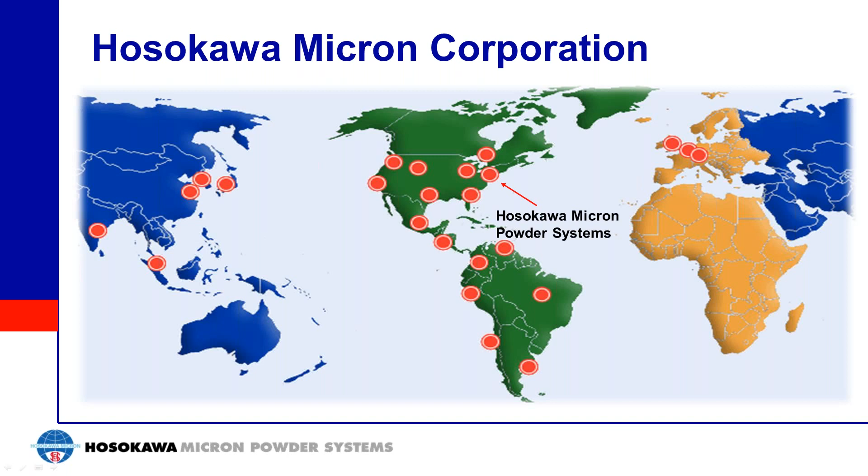Hosokawa Micron Corporation is a global leader in powder processing equipment with headquarters in Osaka, Japan. We employ over 1,500 employees worldwide, have production facilities in 5 countries, and 12 technical centers and research facilities. We design, manufacture, and assemble equipment for size reduction, classification, mixing, containment, isolation, compaction, and laboratory analysis. Our equipment is designed for the chemical, food, pharmaceutical, and mineral industries.

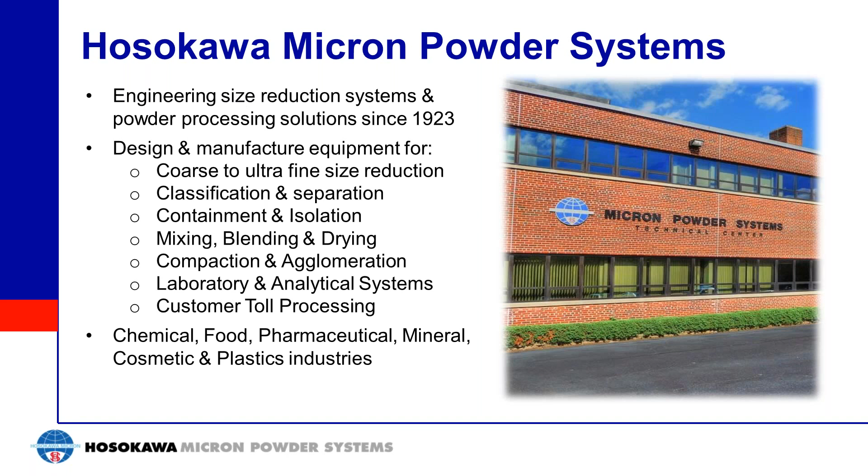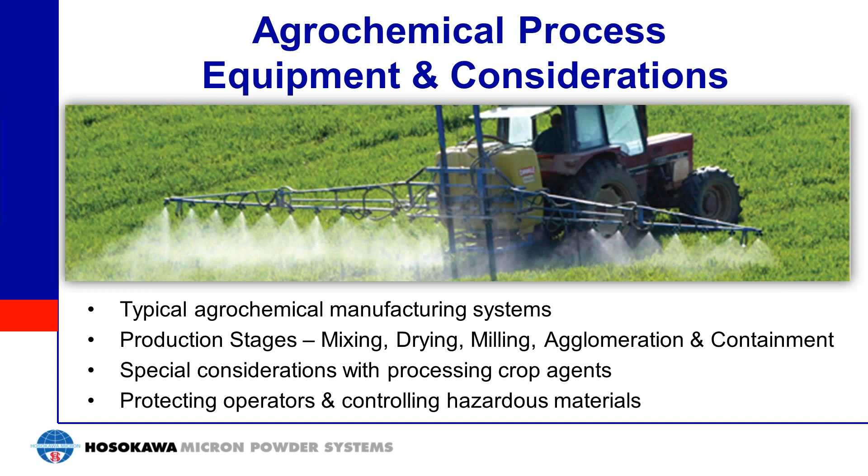Thanks for the kind introduction, Greg, and welcome everyone to today's webinar. Today we'll be discussing the typical agrochemical manufacturing systems, the normal production stages of mixing, drying, milling, agglomeration, and containment, and also special considerations for processing crop agents. Throughout the length of the discussion, we'll be discussing protecting operators and controlling hazardous materials.

So what are the typical steps for agrochemical processing and manufacturing? Well, it normally begins with a synthesis step, which is normally aqueous or involves some sort of liquid-based chemistry. After that, there's nominally drying, mixing, in which you'll take the dried material and add additives, size reduction, which you'll take all those manufactured chemicals and make them into the same size, post-blending, and then agglomeration to produce your final product.

We offer solutions for drying, mixing, size reduction, post-blending, and agglomeration. So these will be most of the steps that we'll be discussing today.

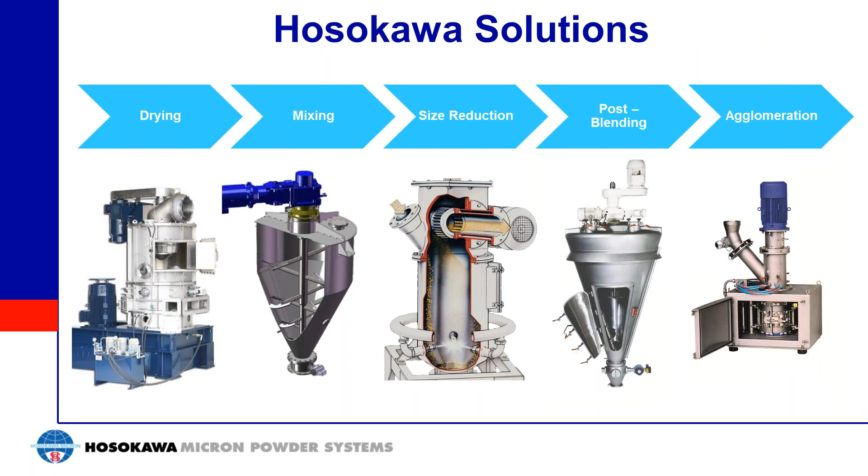So let's start by giving an example of a formulation process. In this process, we start with a feed product that's been dried. We would feed it into mixers that would homogenize the product, and then you can add additives into that mix to form further homogeneous product. From there, you can mill that and collect the milled product in mixers, further adding any final additives before packaging.

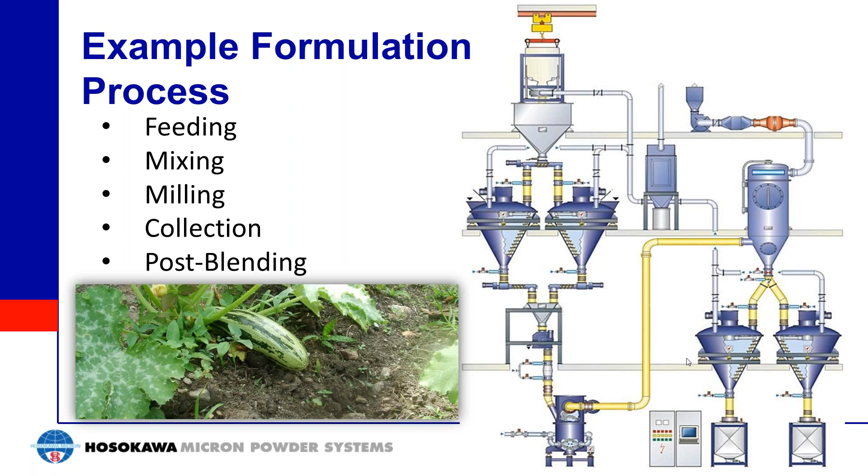So what are we going to consider as we go on today? We'll consider explosivity - a lot of these ingredients and additives are explosive, so we'll talk about how you can deal with that and which processes explosivity needs to be considered for. We'll talk about particle size distribution, how the equipment affects it, and which equipment will provide which particle size distribution. Temperature sensitivity, which will be more about which processes generate heat and how much that can affect your product. Abrasion, which is common in almost all processing equipment and can be compensated for. And toxicity, which for active ingredients should be considered.

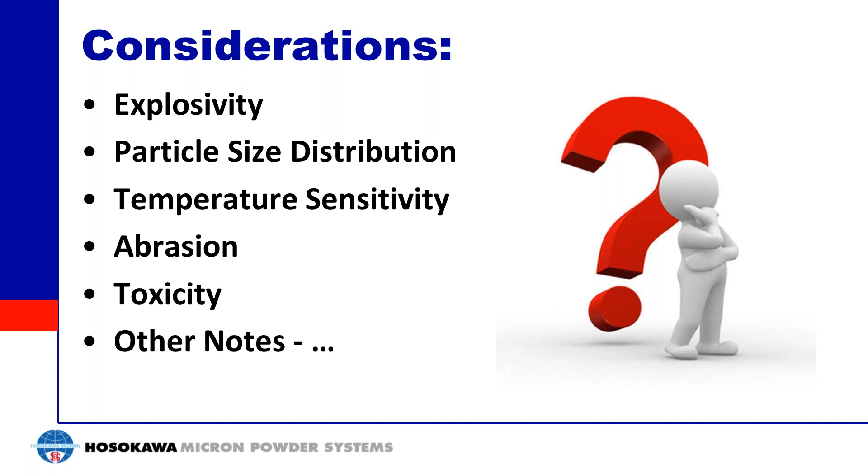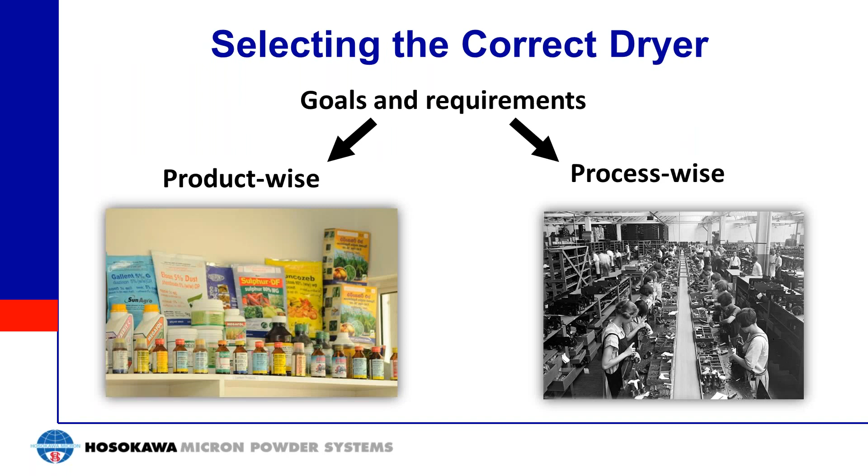So the first step is drying. For drying, you can select your dryer nominally based on 2 ways, the product or the process. If you're basing your selection on the product, what you consider is the form and feed of your product, the liquid and solid properties that you're feeding into the unit, the initial and final moisture content, and the toxicity and other safety hazards.

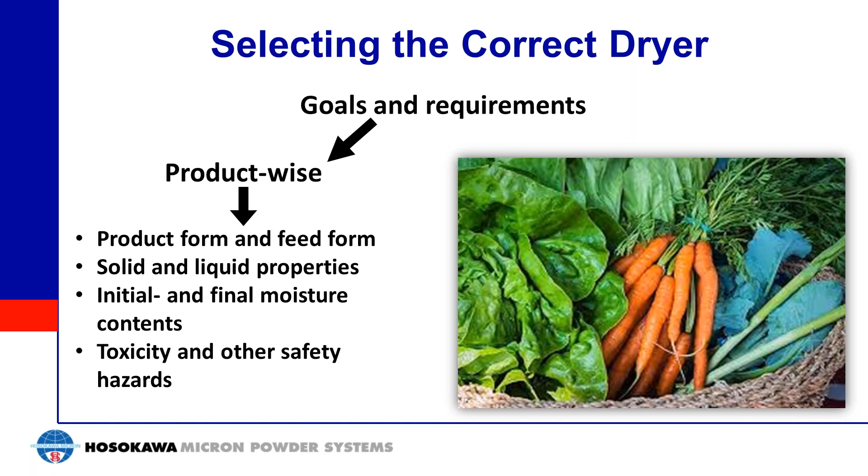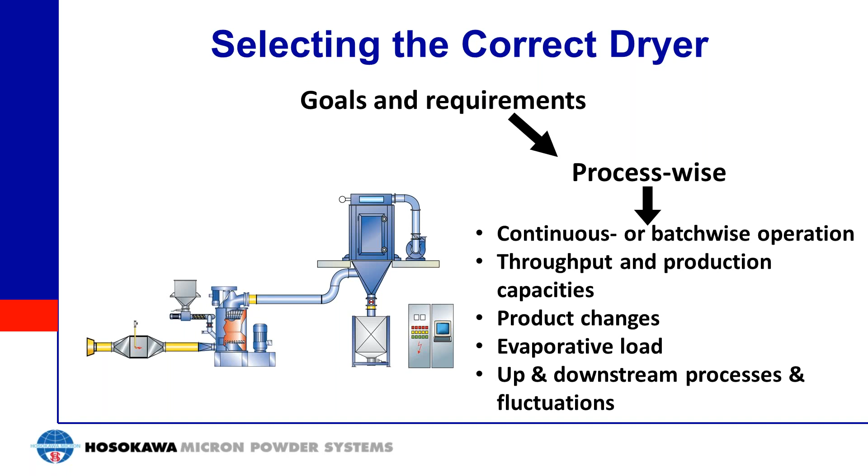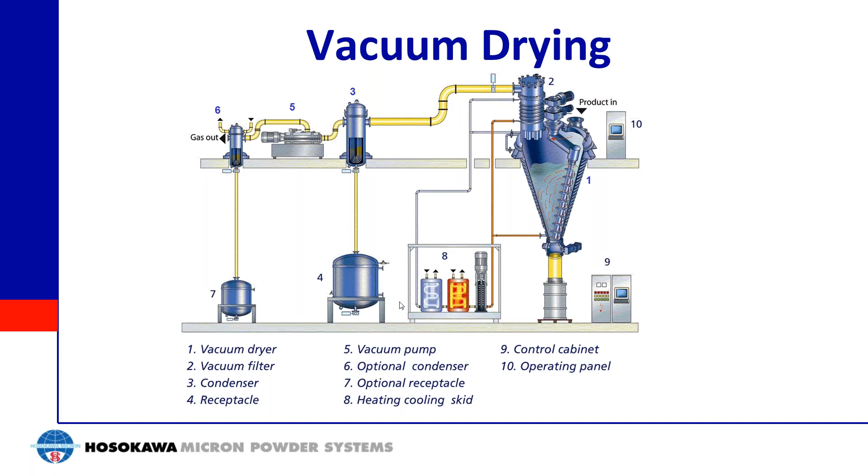So the first type of technology that we'll be considering for drying is the vacuum dryer. The way the vacuum dryer works is product is added into the vessel. Inside the vessel, you pull vacuum and you add heat into the system through the wall. The heat interacts with the product and evaporates the liquid off. The liquid comes out through the vacuum filter onto the primary condenser. Beyond the condenser is a vacuum pump and a secondary condenser. You also have condensate receptacles and a heating and cooling skid.

So what are the considerations? For explosivity, vacuum drying is less of an issue because you have vacuum, no oxygen. Also, you have such slow speed that you're not going to be generating sparks inside the batch. You're using vacuum to dry your product, so it's also good for temperature-sensitive products. And because it's a gentle process, you're going to get minimal size reduction. You're also going to get low abrasion because you have a slower process. As a side note, because it's a slower process, it's going to take longer to dry your product.

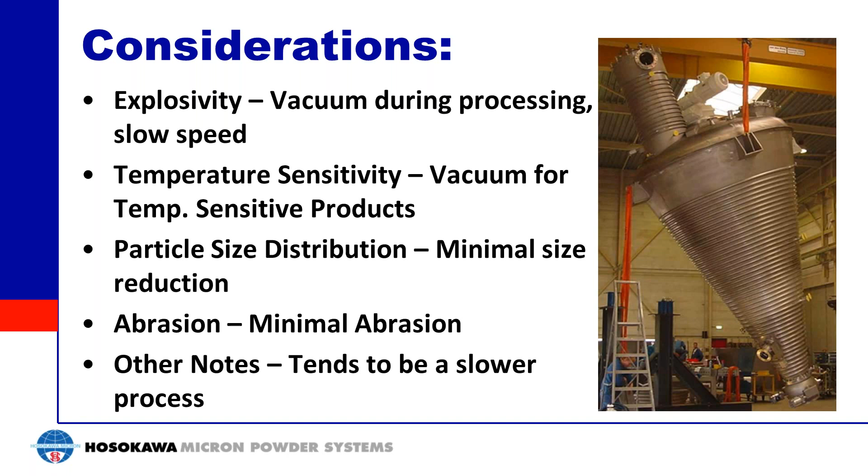Moving on, we have our DryMeister DMR flash dryer. Now this is a continuous process and can give you a final moisture of about 5 to 10 weight percent. The way it works is the product gets dropped into a hopper and fed into the dryer.

Once inside the dryer, it falls onto this spinning rotor at the bottom, which is going to disperse the product in air. Once the product is dispersed in air, hot air is going to come in through the bottom, up around that dispersed product, and dry it out. The dried product is then carried by the air up to an air classifier. What the air classifier will do is that product that's fine enough will go through the air classifier, and product that is still too coarse will get rejected and sent back down for more drying.

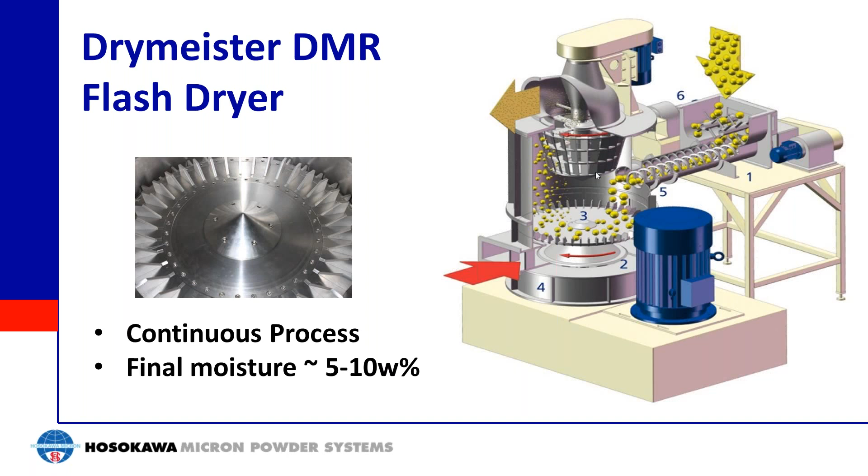So what are the considerations for this type of dryer? Obviously, explosivity needs to be considered because this can generate an explosive dust inside the dryer. You're using heat to dry, so temperature sensitivity also needs to be considered, and this type of system is less applicable for a temperature-sensitive product. You have the dispersion disk rotating in the bottom, so you can cause some degradation, shifting your particle size finer, and abrasion, obviously, for this type of system.

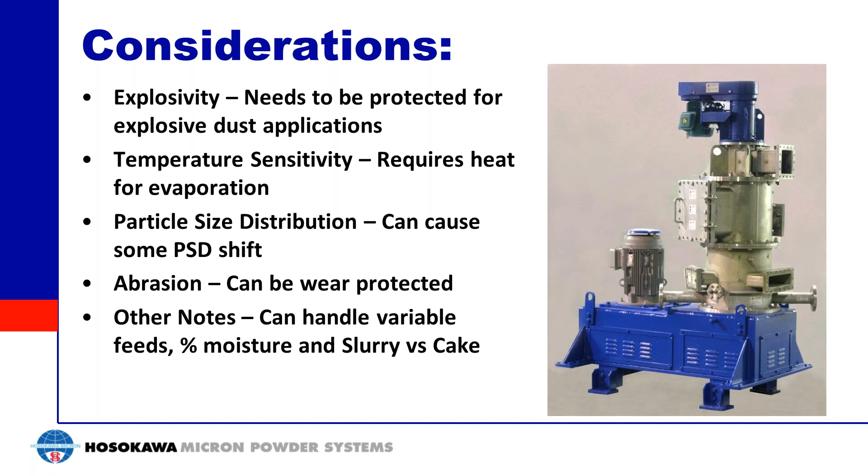On the other note, this system can handle variable types of feeds, including pastes, slurries, and filter cakes, and you can vary the moisture content within that feed or amongst different feeds, so it's very flexible. Moving on from drying, we have mixing.

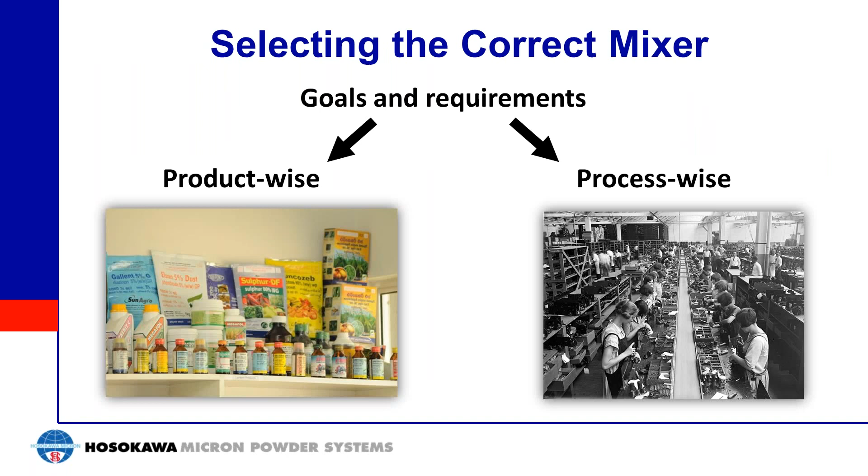Mixing is similar to drying. You can select the mixer based on the product or the process. For the product, what you could consider is if you have a cohesive or a free-flowing powder. The quality of the mix required tends to be based on the sample size and how big of a product your end customer is going to be using. The fragility of the product is also a factor, as some mixers that mix more rapidly can be more intense and can break up a fragile product. And again, toxicological data and safety hazards should always be considered.

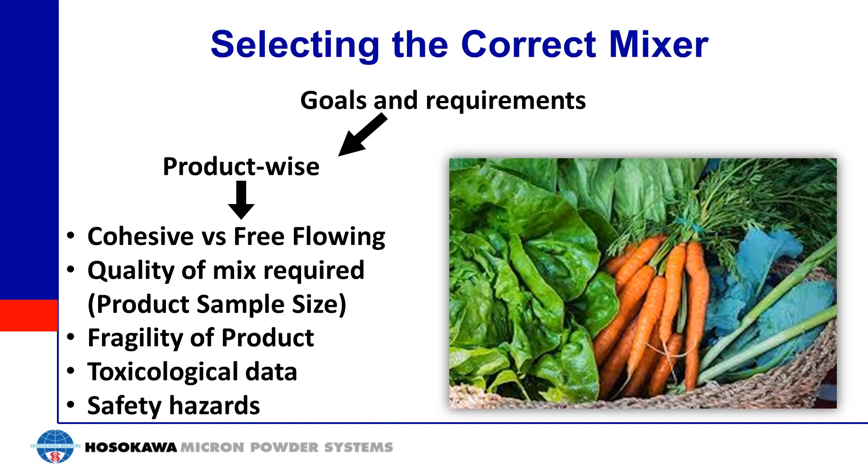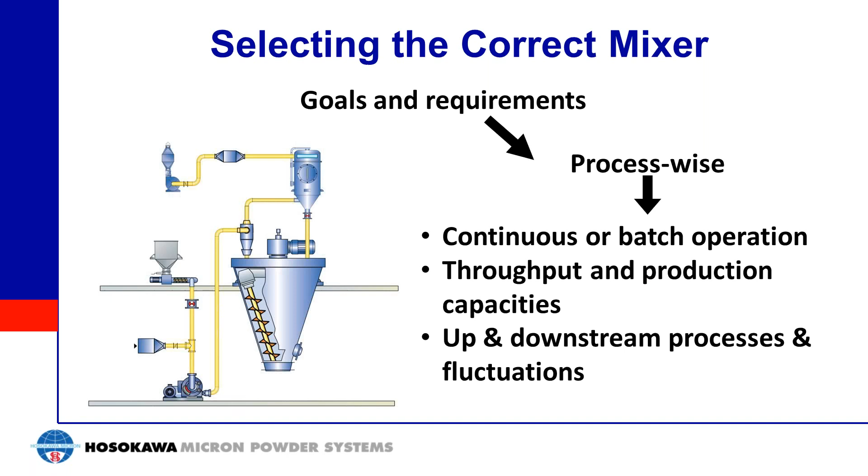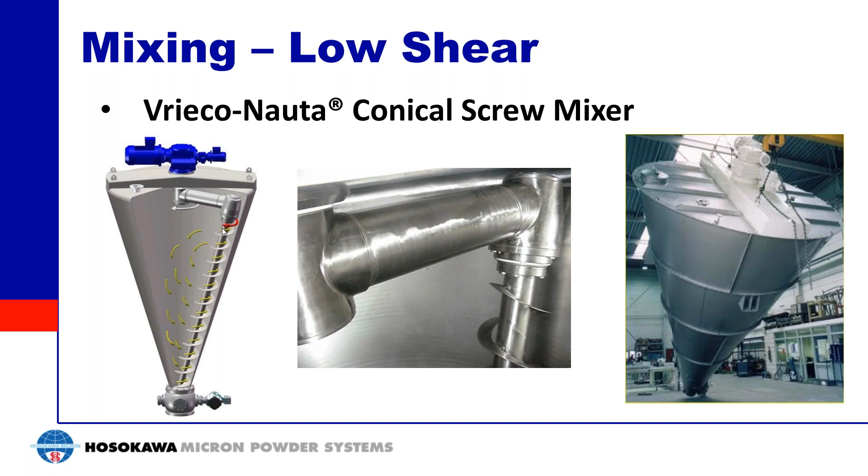What are the considerations for this type of mixer? Explosivity is less of a concern here because you have a very slow and gentle mixer. Because of that, you're also not going to be generating much heat and you're not going to be shifting your particle size. You're going to get minor abrasion, although we can do wear protection on the auger to prevent abrasion in that portion. As other notes, this is a large, gentle, and slow process.

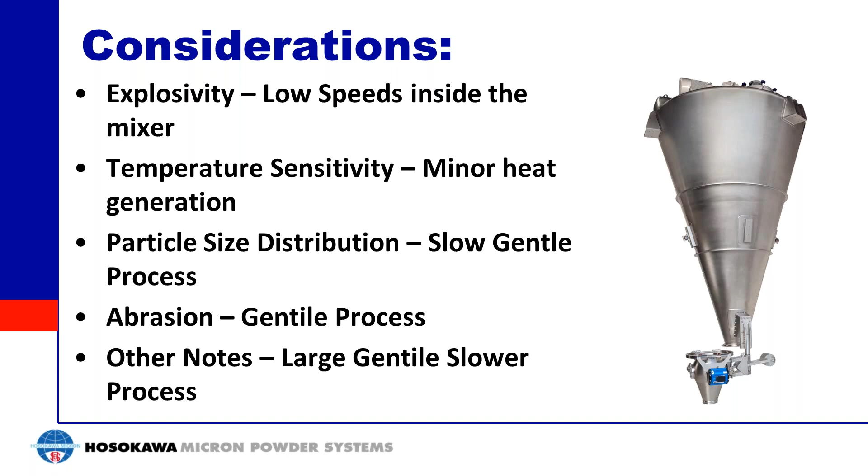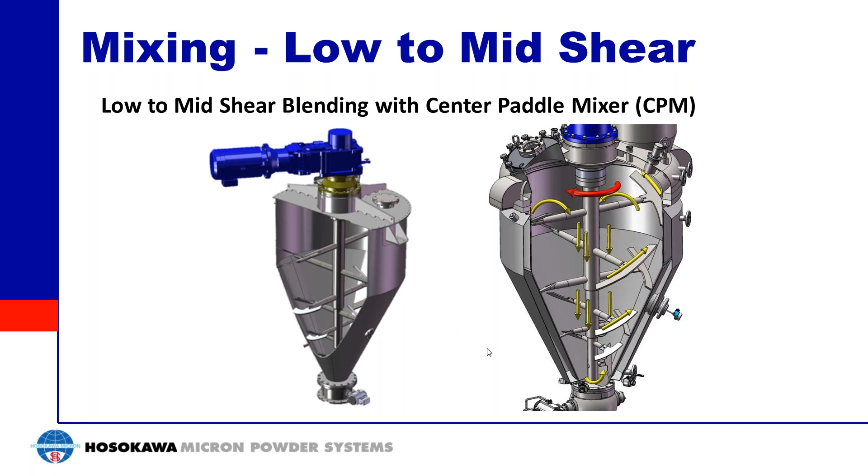So what are the considerations for this type of mixer? This type of mixer is going to be a more rapid mixer than the low shear mixer, so you can have enough speed to fluidize the batch inside, causing a situation where you can have an explosive dust cloud. You're still going to see minimal temperature increase, but it may be higher than you would see on the Nauta.

For particle size distribution, you're going to see minimal change in the particle size, but it is possible to see abrasion because there are higher speeds in this type of mixer than in the other. One final note is that this type of mixer requires a free-flowing powder, similar to the more complex auger types we were discussing for the vacuum dryers.

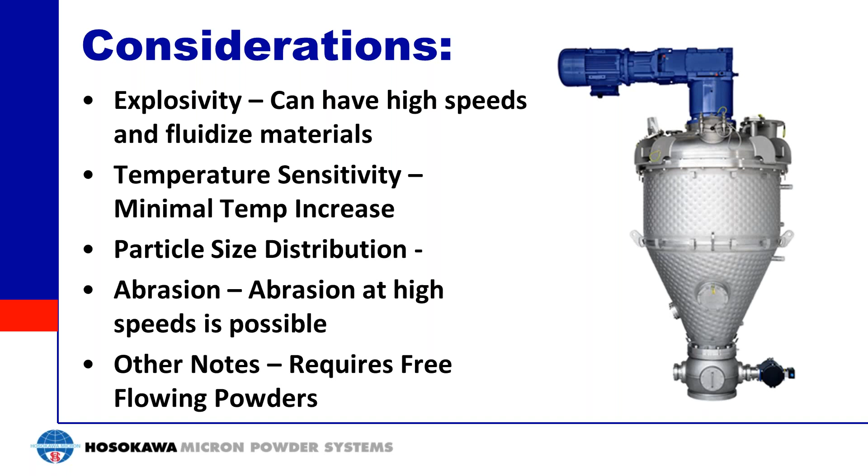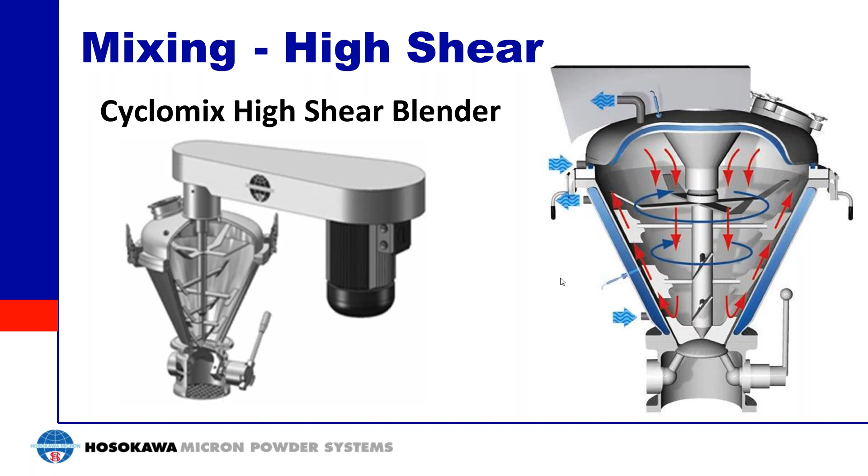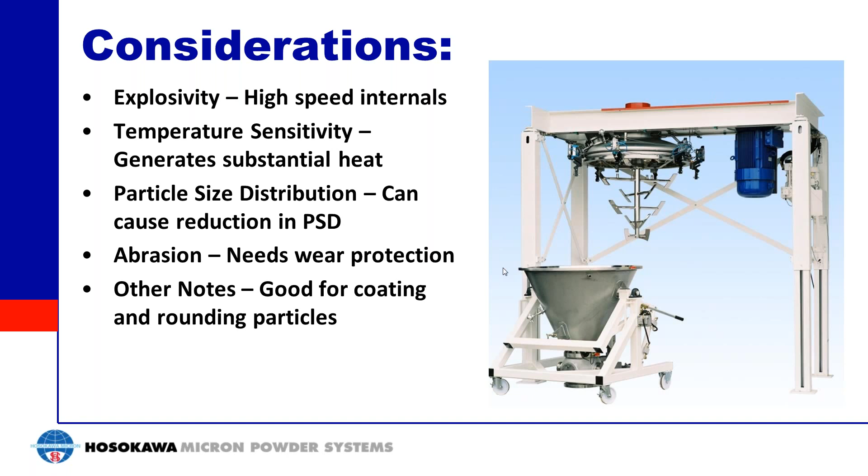So obviously, because you have a more intensive mixer, you're going to have to worry about explosivity. You can make these with pressure shock resistance or inerted construction. As mentioned last time, temperature sensitivity needs to be compensated for with the jacket. You will see some shift in the particle size if you have a fragile product, and we do consider abrasion for this type of mixer. As a side note, this mixer is good for coating and rounding particles.

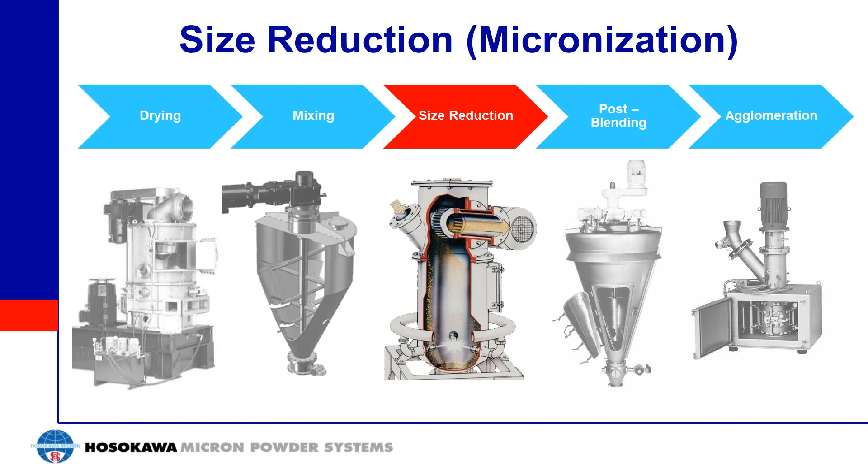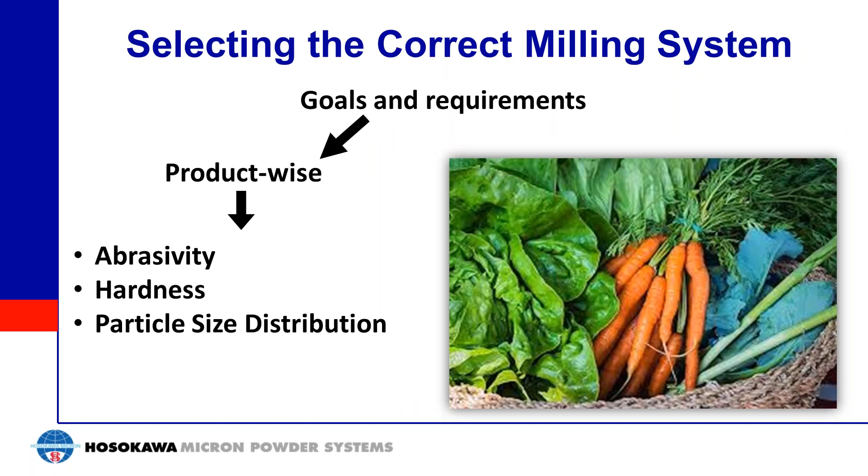Moving on, we have size reduction, also called micronization. For this, again, you can select based on the product or the process. For selecting based on the product, you select based on the abrasivity of the product, the hardness, and the particle size distribution of your end goal. If you're selecting based on the process, you can select based on the feed size - some milling processes need a pre-milled feed, so they would be less flexible.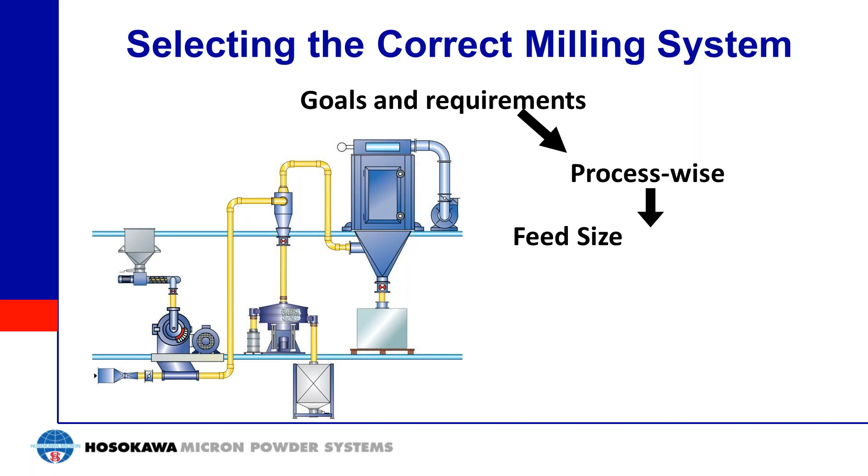Before we get into the details of all the different milling technology, we'll discuss toxicity. For milling, you have to consider toxicity for every type of mill. If you have a highly toxic product, what you can do is take the mill and put it into an isolator or a containment system. This will contain the system and provide your operators with the highest amount of safety. All these systems are custom designed and are available in a wide variety of sizes and configurations.

For explosivity, this also needs to be considered for every type of mill. To compensate for explosive products, we tend to go about it in four ways. You can inert the system, you can create the system with such strength that it can withstand an explosion, you can suppress an explosion, or you can take the explosion and vent it to a safe area.

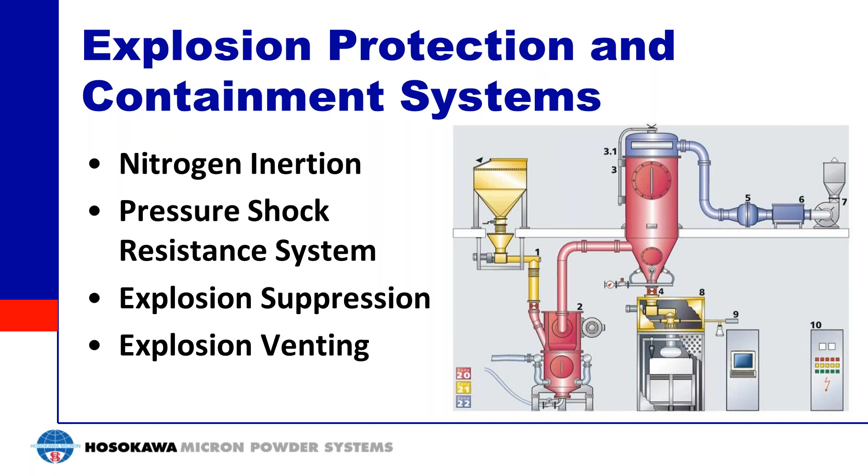So moving on, we'll go on to the specific types of equipment we use for size reduction of agrochemicals. To start, we'll discuss the Mikro Pulverizer, hammer, and screen mill. The way it works is you have two sections: grinding and screening. For the grinding section, what happens is the hammer impacts the particle and breaks it up.

The pieces are pushed outward towards the liner. The liner takes these pieces and directs them back into the path of the hammer, allowing for multiple impacts. As you move around, you get multiple impacts down to the bottom of the mill where you have a screen. The particles are moving tangentially to the screen, which has a much smaller hole, and they will either slide through that small hole or bounce off it and get milled further.

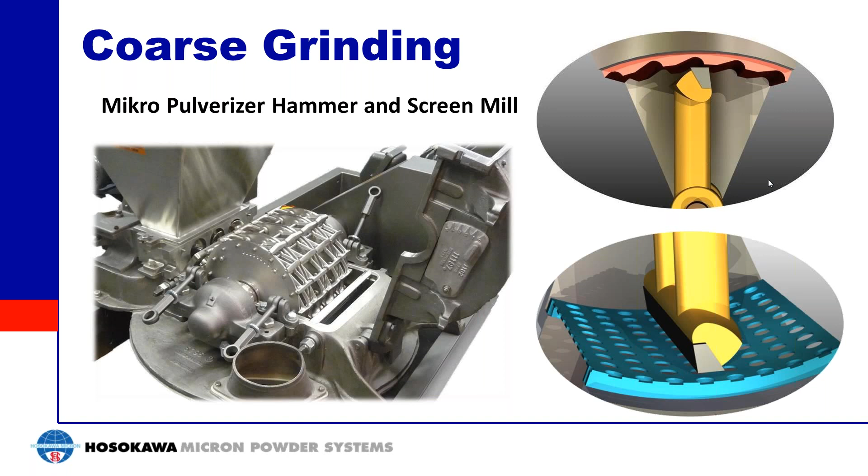These systems tend to come in two configurations: bunker style, in which the mill sits directly on top of a hopper, or air conveyed style, in which the product coming out of the mill is conveyed to a cyclone or a baghouse and then possibly screened to give you your final end product.

The cyclone is interesting in this type of system because what it does is it allows you to run multiple different products and not have to do as much cleaning. So if you wanted to mill multiple products, you could clean only up to the cyclone and not the dust collector between each batch, allowing you to have a quicker turnover time and do more different types of products.

So what are the considerations? Obviously, explosivity needs to be protected. This type of mill is going to give you a medium to high temperature increase. You're probably talking 20, 30, maybe even 40 degrees. For the particle size distribution, it's going to be controlled by a screen, but the screen is a pretty good, but not great control mechanism, so you're going to get a medium to wide particle size distribution. And abrasion, for these mills, we can compensate with wear protected parts, but there's a lot of parts inside. So if you have a very abrasive product, we would say you might want to consider a different type of mill.

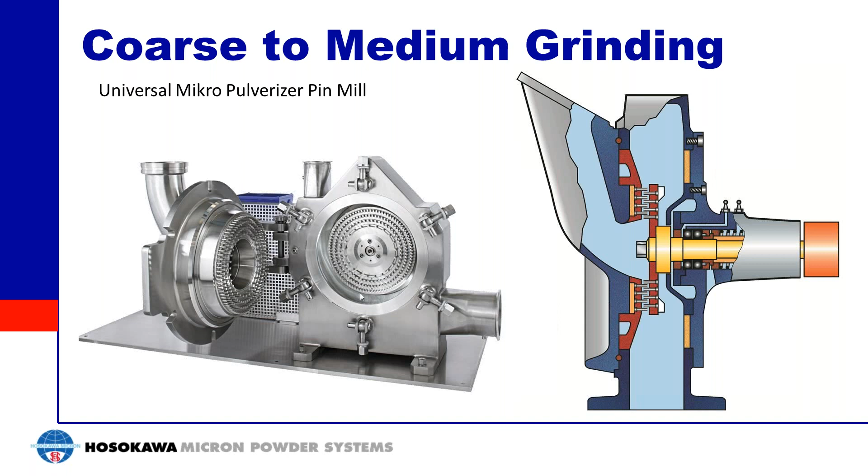Moving on, we have pin mills. For pin mills, the way that it works is the product gets fed into the middle, and you have a stationary disc on one side and a rotating disc on the other side. The product gets impacted off the pins and bounces between the pins, between the rotating and the stationary pins, and works its way out. Once it gets out to the outside, it falls around to the bottom where it can be discharged via gravity or air convey.

There's two ways that we configure these systems similar to a hammer mill. Bunker style, in which the mill sits directly on top of a hopper, or air conveyed style, in which the product gets conveyed out of the bottom of the mill into a dust collector.

So what are the considerations for this type of mill? Obviously, it needs protection to deal with an explosive product. The temperature gain on this type of system is going to be less than compared to a hammer mill. So you're going to get less heat, making it more suitable for a temperature-sensitive product. It's going to give you a wide particle size distribution, but it's going to give you a finer end product than you would see for a hammer mill. For abrasion, these systems have a lot of small parts, so they can be hard to wear protect, making them very difficult for abrasive products. We can make the pins out of hardened metal, however.

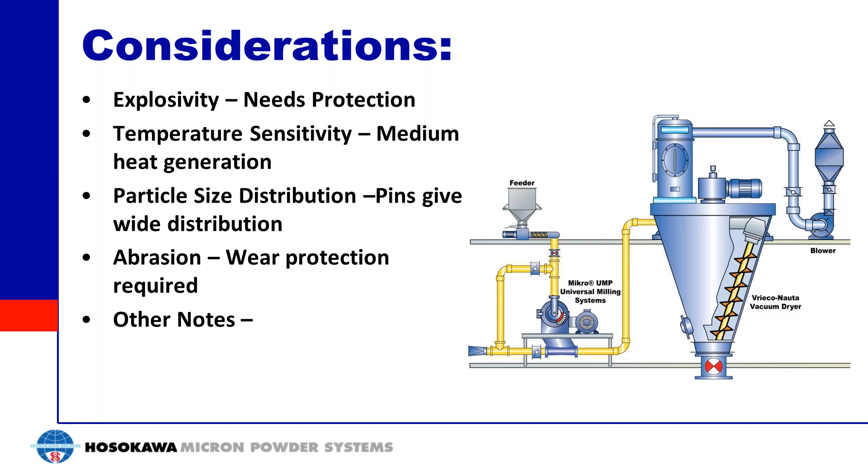Moving on, we have the air classification mill. For an air classification mill, the way it works is that the feed comes into the side of the mill, into this zone here where you have the hammers rotating on a disc at the bottom. The feed gets impacted by the hammers and gets carried up by air that's pulled in through the bottom of the system and around the disc. The product that's milled gets carried up to the classifier. The classifier is going to accept fine particles through and reject coarse particles back down to the milling zone. The fine particles get carried out with the air to the dust collection.

These systems look similar to the air conveyed systems for the other types of mill, in which you have the mill and then the product is conveyed out via air to a dust collector.

So what are the considerations? You're going to get a medium amount of heat generation. Compared to the other types of mills, the entire flow of air that's conveying the product is going to be going through the mill. And that's going to give you less heat generation for this type of mill than you would see for a hammer mill or a pin mill. Because you have a classifier inside, it's going to give you a narrow particle size distribution. And if you have an abrasive product, we would wear protect the hammers and the classifier.

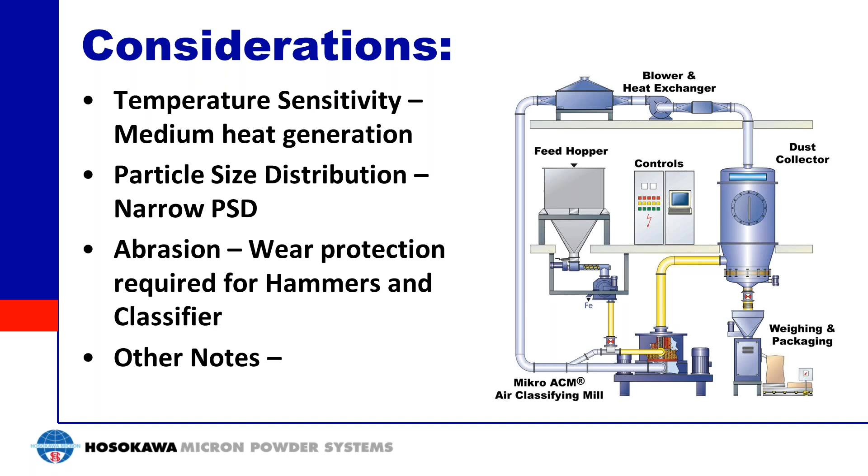Moving on, for a very fine product, we have what we call the AS spiral jet mill. For the spiral jet mill, the way it works is the product gets dropped in through the top and fed in using compressed air into this opening right here. The products spin around inside the chamber, bouncing off other products or other particles of the product and the wall, causing size reduction. The products, as they get finer, move into the center and discharge out the center and the back.

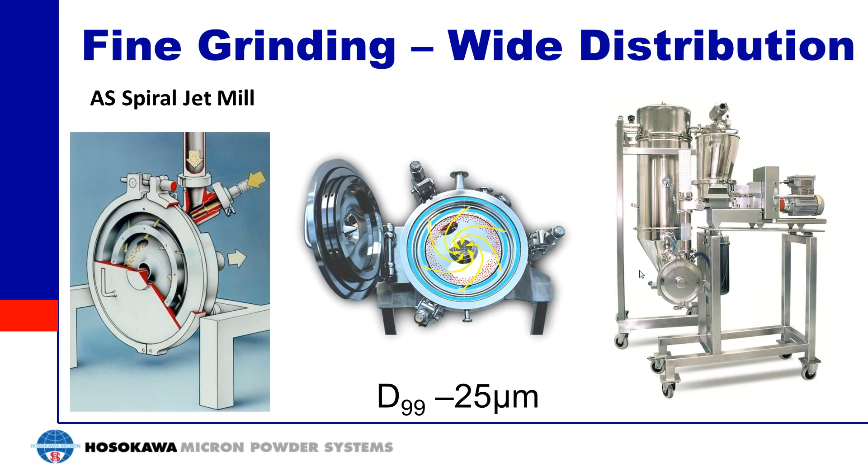So what are the considerations? For this type of mill, all the air in the system is going through the mill, again causing low heat generation. For the particle size distribution, you're going to see a medium to wide particle size distribution. You're going to get a much finer product with this type of mill, but it will still be a wide particle size distribution because there is no classifier or no real size control inside the mill. For abrasion, you're going to see a medium amount of abrasion. The product size reduction is caused by impact on other products and on the wall, so that needs to be compensated for. And if you look at this mill up here, what you can see is actually a ceramic body, so we can make these mill interiors out of ceramics, helping to negate the abrasion. One thing to note is that there is limitations on the feed size for this type of mill, so you may need to pre-mill your product before feeding it in.

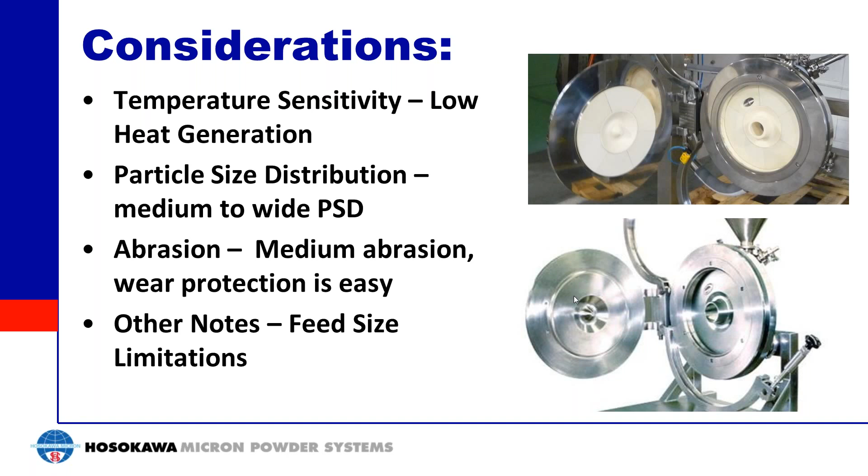Moving on, we have fine grinding using the AFG fluidized bed jet mill. For this type of mill, the product gets dropped in through the top and falls into the bottom of the chamber. In the bottom of the chamber, there are air nozzles. Product falls into the air and is pushed into the center of the chamber where it impacts other particles of the product. The impact causes the size reduction, and once the product is fine enough, it gets carried up to the top of the chamber. When it's at the top, the coarse products get rejected and sent back down to the bottom, and fine products go through.

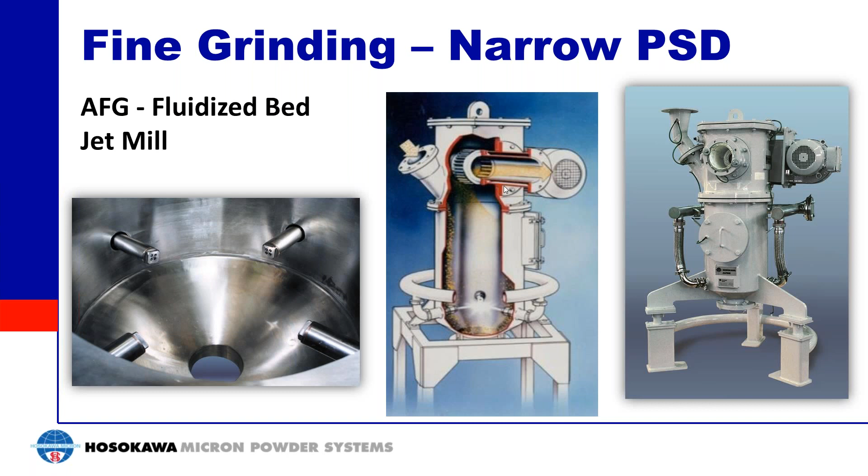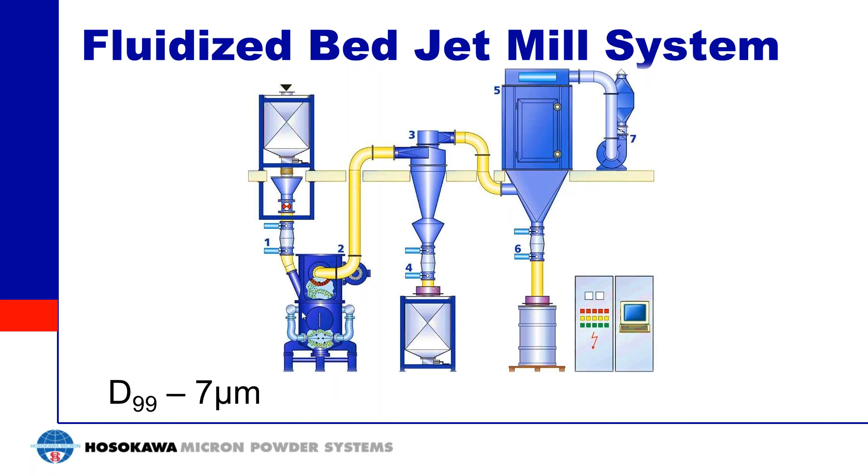This is a normal configuration of a fluidized bed jet mill. The feed comes in through the side, into the milling chamber here. The product gets carried out to the cyclone and then onto a dust collector. This is the finest of all types of milling systems that we offer. It can give you a D99 down to even 7 microns for some products.

These mills are good for temperature-sensitive products because they have low heat generation. They also give you a narrow particle size distribution. For abrasive products, they work relatively well. You're not using any mechanical items inside the mill to do particle size reduction, so there's less cause for abrasion, but we do wear protect the classifier.

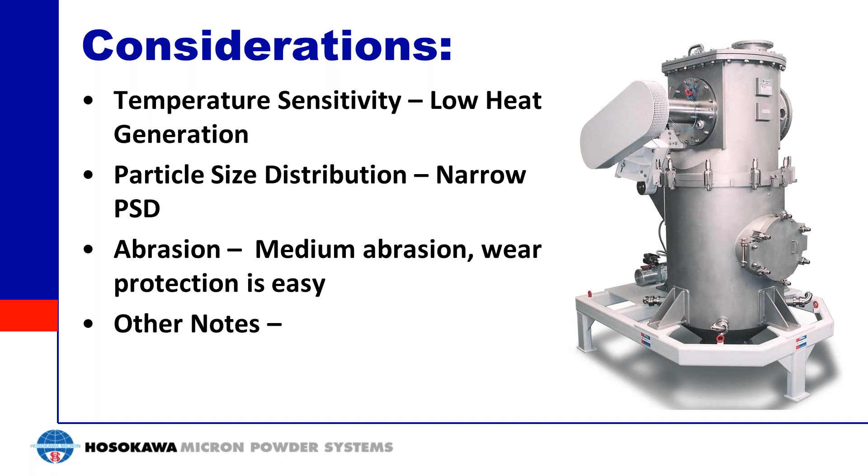Moving on to post-blending. This is going to be similar equipment to the primary blending step. However, you're going to have a smaller particle in this step of the process, so it's normally going to be more cohesive. So you may need to select a different type of mixer for this type of process.

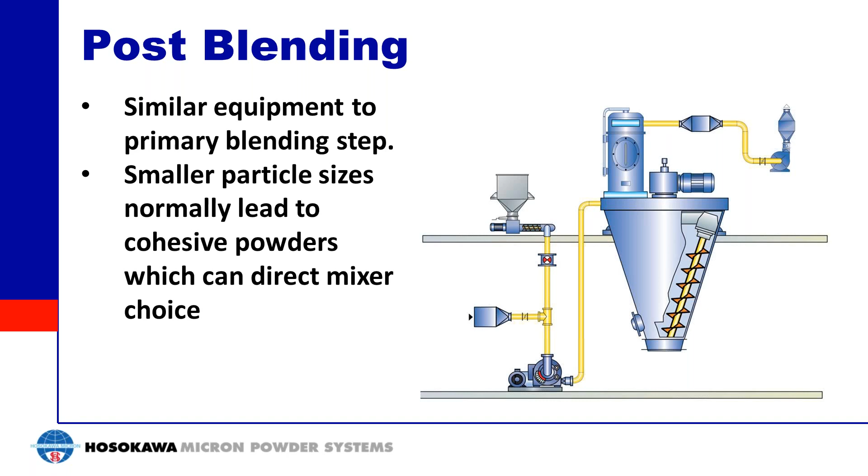The next step we're going to be discussing is agglomeration. For agglomeration, we use what we call the Flexomix. The Flexomix is specifically applicable to agrochemicals because we use it to create what we call a water dispersible granule.

The way the system works is that dry feed is fed into a chute on the side and falls into a mixing chamber, which is this red section here. Liquids are sprayed in through the top through these nozzles, which are pointed directly down into the mixing chamber. As the product falls in, it gets dispersed by the rotor and mixed thoroughly with the liquid that's sprayed in. What it gives you is a cluster of agglomerates where you have powders that are encapsulated in liquid and stuck together.

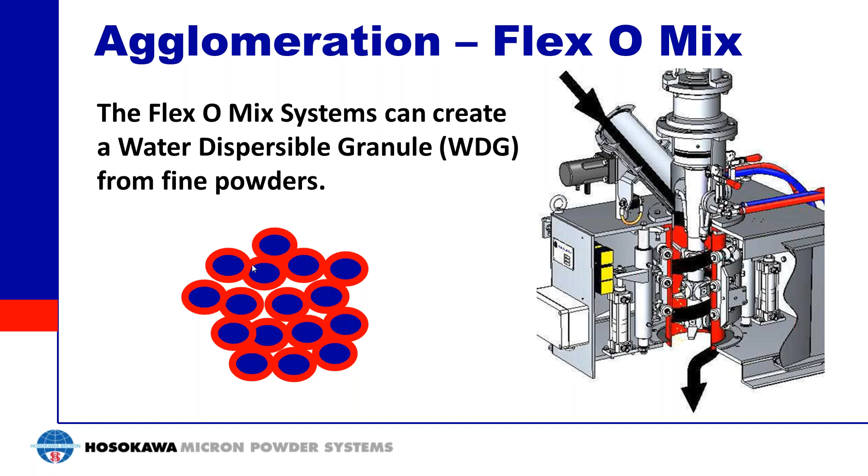The way these systems work is that coming out of the Flexomix, you often fall into a fluidized bed dryer, and the fluidized bed dryer will evaporate off the liquid. Following the fluidized bed dryer, you go to a screener which can take out any large agglomerates, and then you can collect the product.

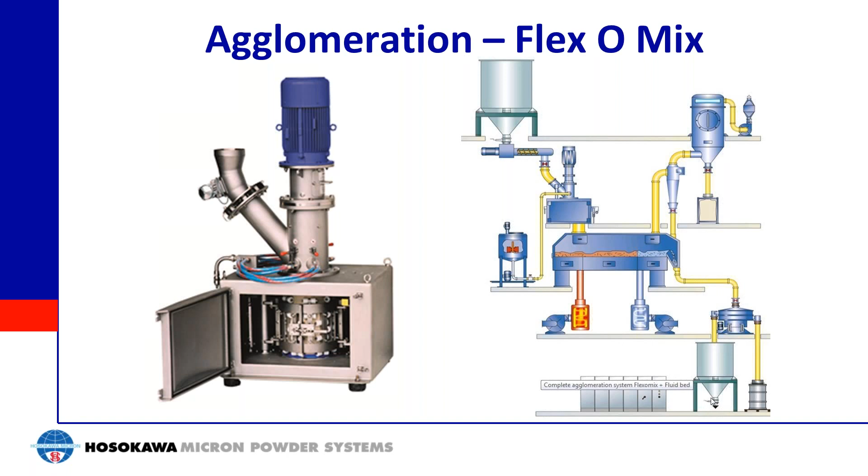So what are the considerations? For explosivity, this can be an inerted system, so you can run it with nitrogen to help control an explosive environment. It's going to require heat to dry the product, so this heat can be bad if you have a temperature-sensitive product. You're going to get a medium to wide particle size distribution, so we recommend screening for an oversized product. There's going to be low abrasion in this type of system if you have an abrasive product.

Another note is that if you want to generate a low pressure extrudate, these systems are common for generating feed for that type of system. What you would do is go directly from the Flexomix into the low pressure extruder. You're going to get a good pre-mix before your extrusion step, and it can also often benefit the operation of the extruder.

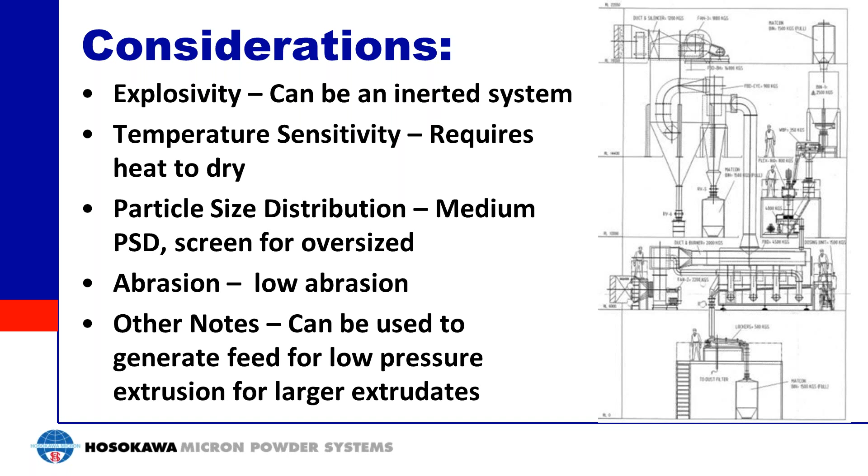Moving on, we have powder densification. For this, we use what's called the Micron Denspack. The way this works is product gets fed in through the top into a rotary valve with a screen on the inside. The screen removes the air in between the products, densifying it as it goes through. Once it gets to the bottom, a pulse of compressed air pushes the agglomerates out the bottom. These products can increase the bulk density from 30% to up over 100%.

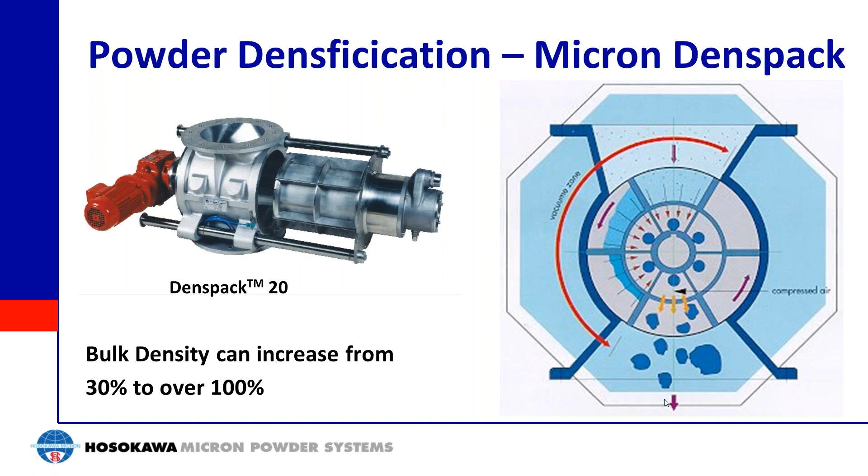One final piece of equipment we'll be discussing is downflow booths. The way the downflow booth works is that you have downdrafted air, which takes any particles that may be entrained in the booth and pushes them down to a filtration system, which removes them from the air. These systems tend to come with three types of filters: primary, secondary, and HEPA filters, and a fan that recirculates the air.

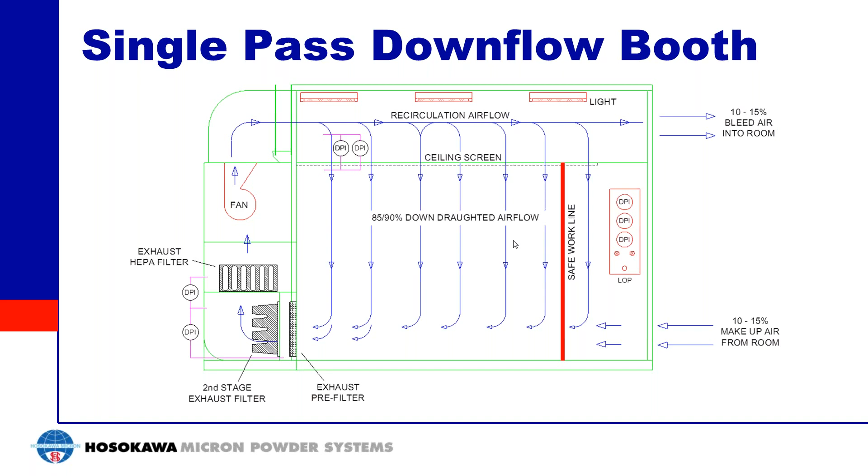We use these systems for two main reasons for agrochemicals. We use them for sampling booths, in which you would take multiple different products, put them in the booth, and remove samples. This allows you to remove multiple samples in a safe environment and not have your operators interacting with high amounts of entrained particles during the day.

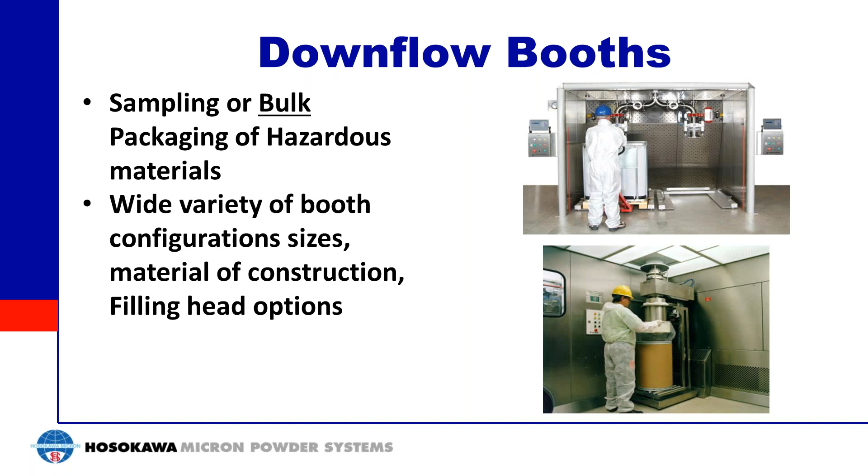The other way that we use them is for filling systems. If you wanted to fill bulk containers such as drums or totes, we can put the filling mechanism through the top of the booth, allowing safe operation for your operators.

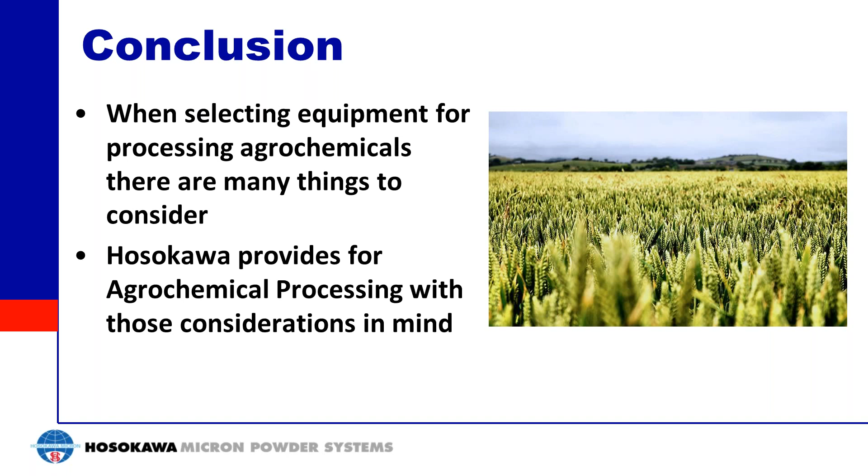So to conclude the presentation, when selecting equipment for processing agrochemicals, there are many things to consider. We make equipment that takes these considerations into mind. Thank you for your time.

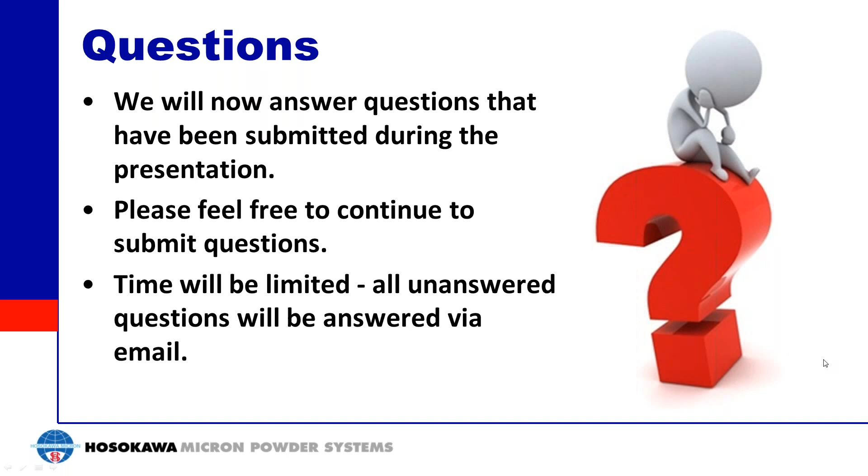All right, first question: which vacuum dryer works best for slurries? We have a couple different models of vacuum dryers as discussed previously. Let's go back. So if you wanted to select based on your product consistency for a slurry, you could probably go with the Nauta type, or you may be able to go with the paddle type. One thing to consider when selecting your type of auger is it doesn't always depend on the product consistency. Often the consistency within the mixer or the dryer can change based on the moisture content at that stage in drying. So you may feed in a slurry or a paste, but it may turn into a thick mud during drying. If you go through one of these difficult to process intermediate stages, you may need to select your auger based on that difficult stage rather than based on the product that you're feeding into it or the product that's coming out of it.

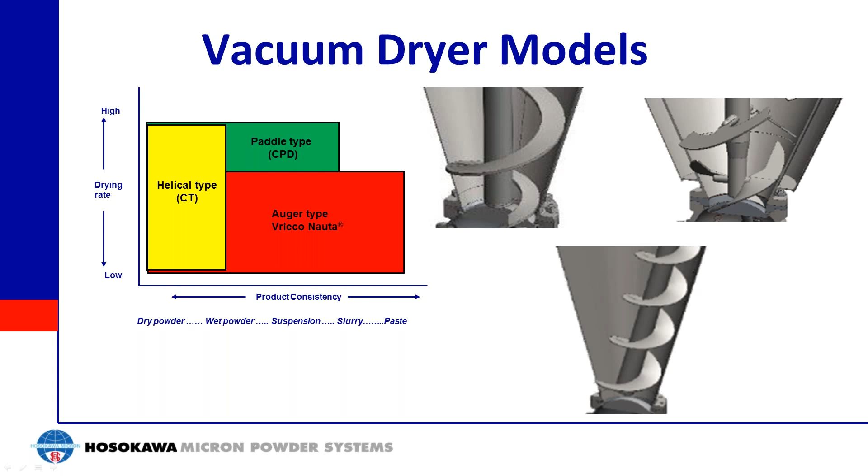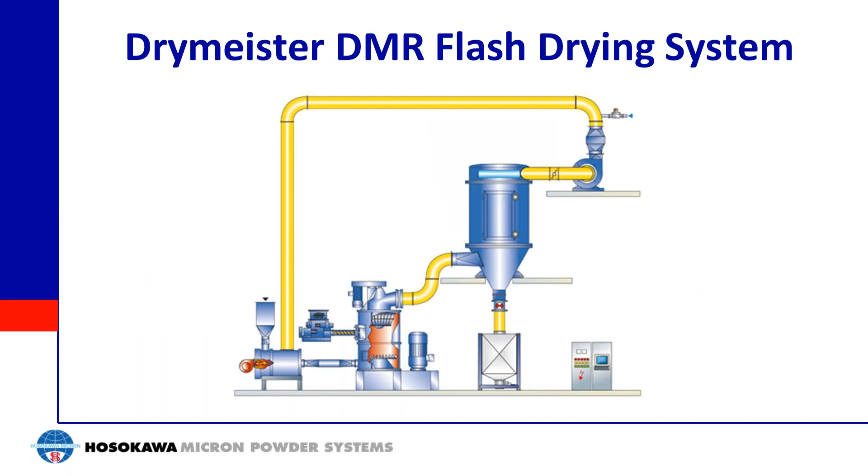How do your mixers fare against other mixing technologies such as ribbon blenders or V mixers? For ribbon blenders and V mixers, our mixers are really just a different type of mixing technology. Those mixers can work very well. A V mixer is very good for a free-flowing powder. It's a diffusive mixer, so most of our mixers are convective mixers. What we do is generate a convective current within the mixer, taking product from the bottom and moving it up to the top. A V mixer will rotate and the product will diffuse down the batch. The V mixer is a gentler mixer, but it can have some difficulty if you have a difficult to mix product. For a ribbon mixer, they're a convective mixer as well. The advantage of ours over theirs is that you're going to get a full discharge out of our batch. The advantage of their mixer is that you're going to have a little bit of a quicker mixing time because you have more motion within the batch.

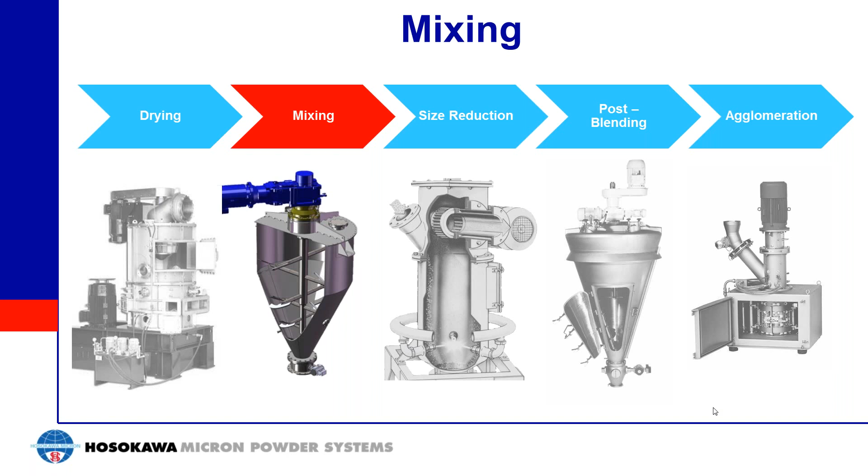If we go back to the typical agrochemical process steps, you start with synthesis and then go to drying. I talked right away about flash drying and vacuum drying. These are both thermal drying steps, meaning you're using energy. In flash drying, hot air goes right up around the product and dries it. In vacuum drying, you reduce the temperature or pressure within the batch and then use energy under vacuum to evaporate the product.

It's always going to be more energy efficient to use mechanical drying first. So we would always recommend that you use a centrifuge or a filter press to get a suitable feed for these types of dryers.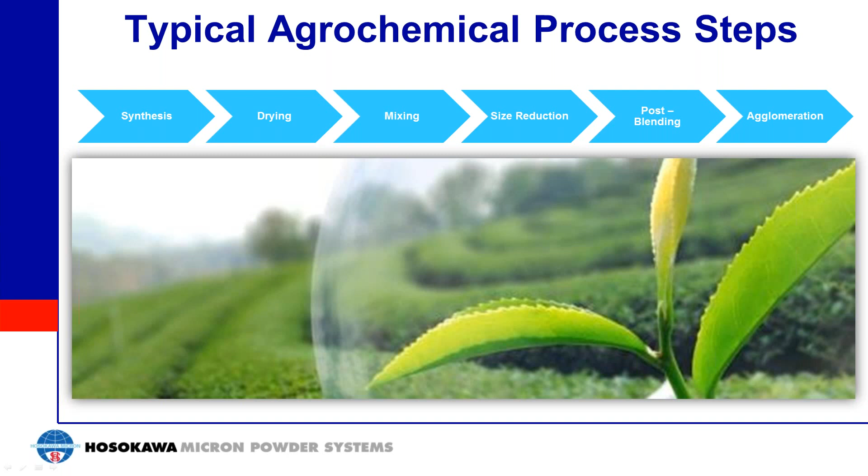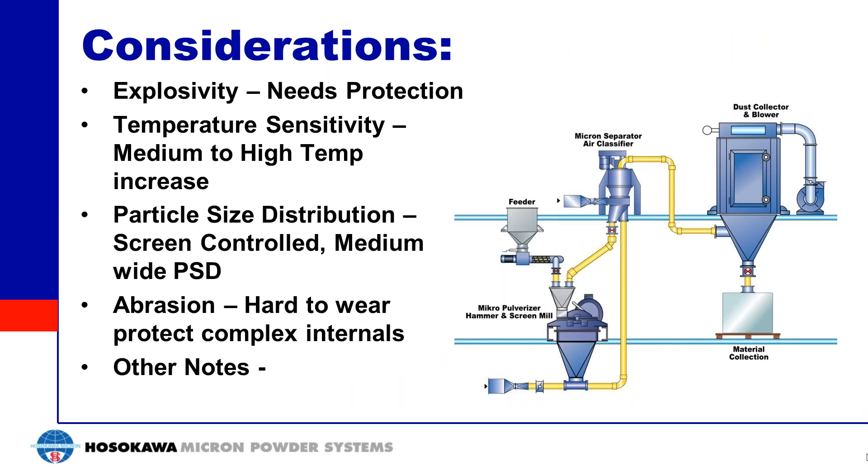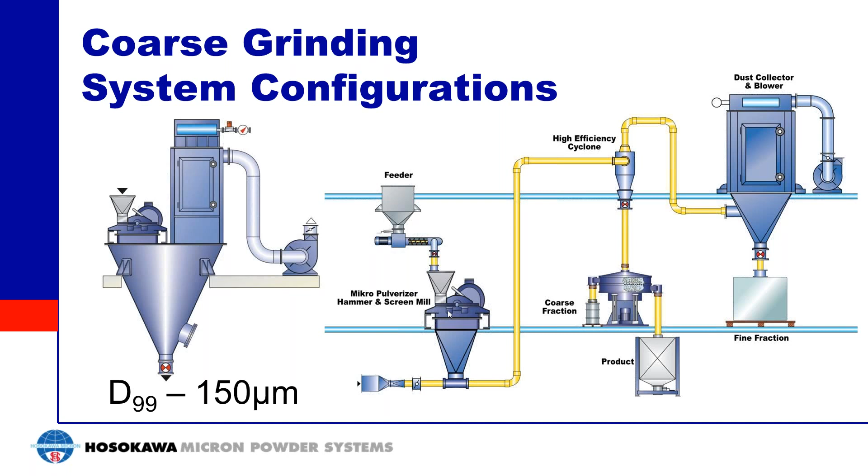Next question: how do you mill ingredients that soften at low temperatures? We touched on this earlier, but the trick is to use a mill that has most of the air going through it. If you look at the hammer mill, for this type of mill, the feed goes through, but there's no air going through the milling section—it's really just product going through, which allows heat to be generated during the process.

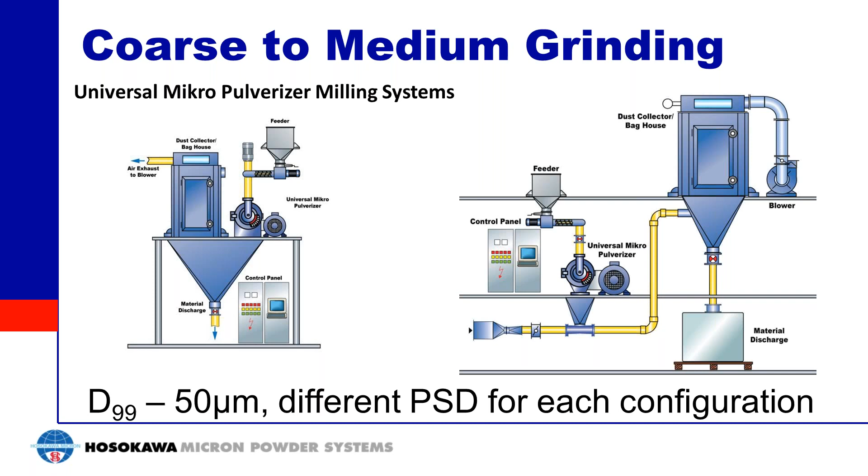If you go to an air-conveyed milling style, the entire amount of air is going through the mill, which keeps it cooler. So if you have something very temperature sensitive, we'd recommend an air-conveyed mill. As a side note, you can also use a hammer mill or pin mill with some cooled configuration to cryogenically mill the material. And for the ACM, you can pre-cool the air going through by putting an air-to-air or air-cooled heat exchanger there, to help control the inlet temperature and therefore reduce the outlet temperature.

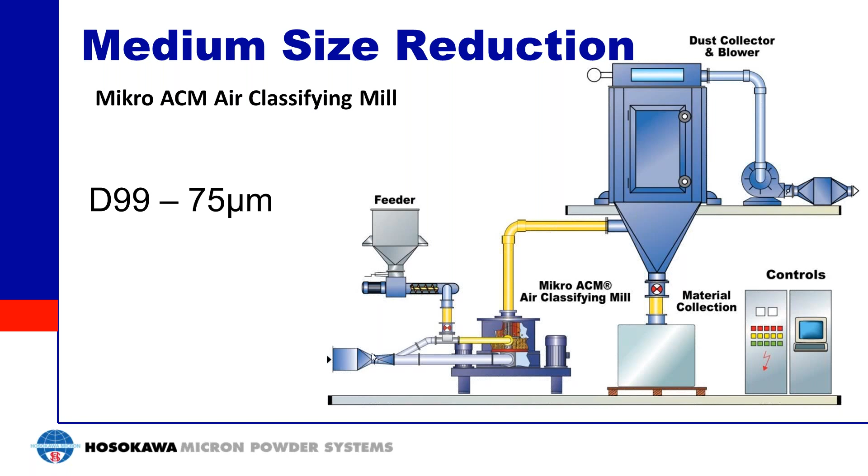Next question: what's the production rate of an air classifying mill? You can get a pretty wide range of production rates for all of this equipment—it can vary between maybe 40 kilograms an hour up to tons and tons per hour. Really, all of this equipment, and most types of equipment, is going to be available in a variety of sizes. One thing to consider is that a continuous process is always going to be smaller than a batch process, in general, so you have to consider your throughput rate.